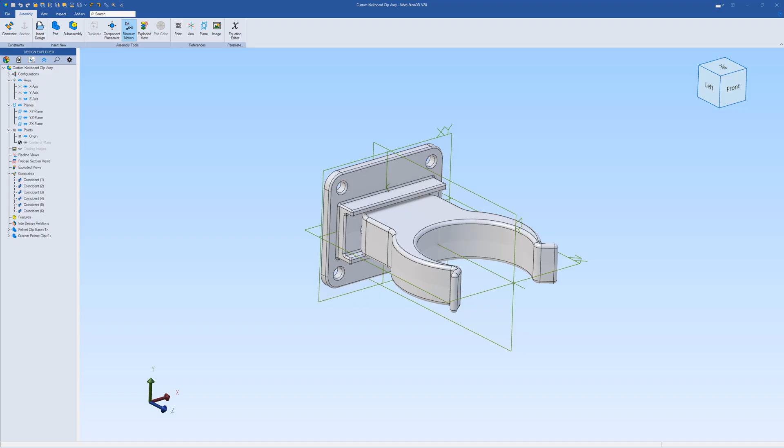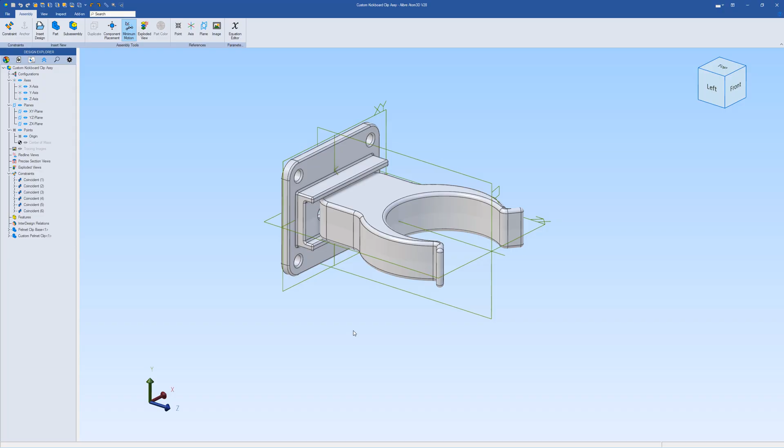Now the next tip we cover is some points on how to manage the 3D view. The standard view controls in Alibre, and most CAD packages, are fairly similar—you'll have the ability to rotate the view, zoom in and out using mouse controls. However, when you're modeling, or particularly when working in the assembly workspace, you end up having to zoom in to select fine details, and it can sometimes become quite confusing as to what part of the model you're looking at.

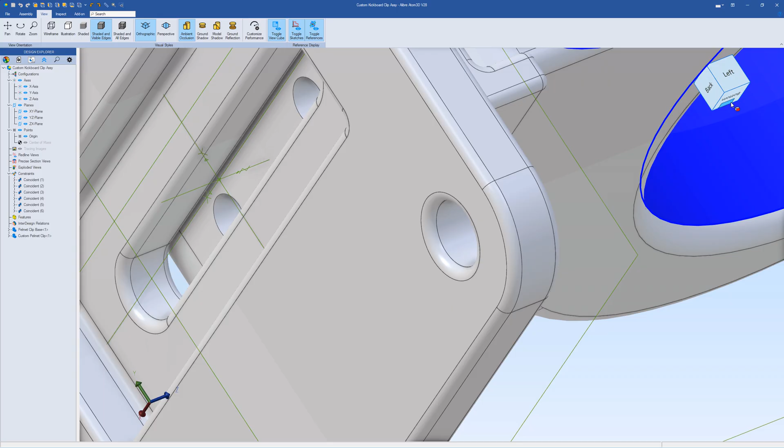So in Alibre, what I recommend doing is making sure that the view cube is turned on. We can just jump onto the view tab and make sure the toggle view cube button is turned on, and that creates this little cube top right here that shows the orientation. We can also click on any individual face or corner, and the software will automatically orient to the selected view and zoom out to fit the whole model.

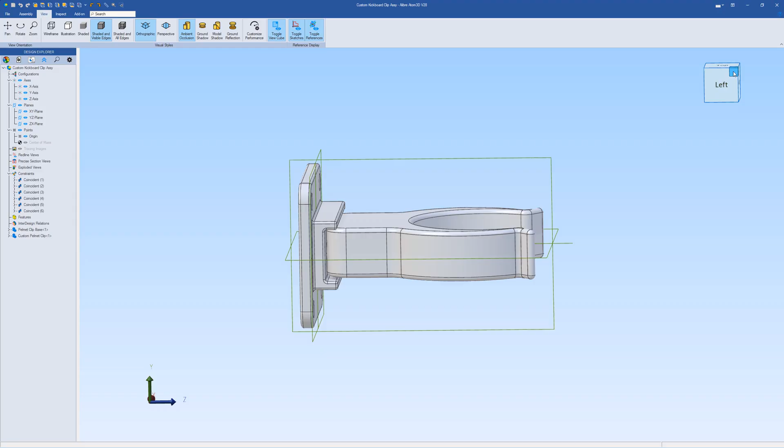For example, if I click on the left view, I'll zoom out and center looking at it from the left, or if I want a 3/4 view, I could pick one of the corners. That means no matter what funny zoomed in weird view I've got, I can quickly jump into something where I can see the overall model and get my bearings back. Particularly when you're starting out, that's a real get out of jail free card on your view.

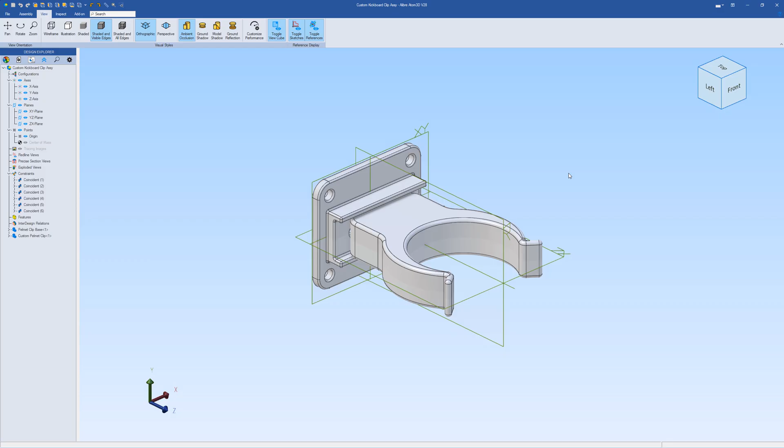So the other thing I wanted to go through, I'm just going to close this model down and the part we had open, and jump back to the Alibre home window. Something else I'd like to point out is that Alibre has some first-rate scaling and visual setting options. There are people I've spoken to who have less than perfect eyesight, or some guys working with the software who suffer from red-green color blindness, and some of the default colors or sizes of things in the out-of-the-box settings might be a little bit suboptimal view-wise. So we can go into system options, and I'll just go to this section.

The first one worth looking at is the design tree settings here under all workspaces, and we can adjust the size of the tree. By default I've got it on small, so if I change this up to medium, for example, go OK, and then jump back into the part we had open before, you can now see the tree on the left has been scaled up, which makes it a lot more readable. The other thing to note is that we can't scale the menu at the top, but the ribbon menu follows the Windows display scaling setting, so that should be scaled to a suitable level based on what you've got your monitor settings set to already.

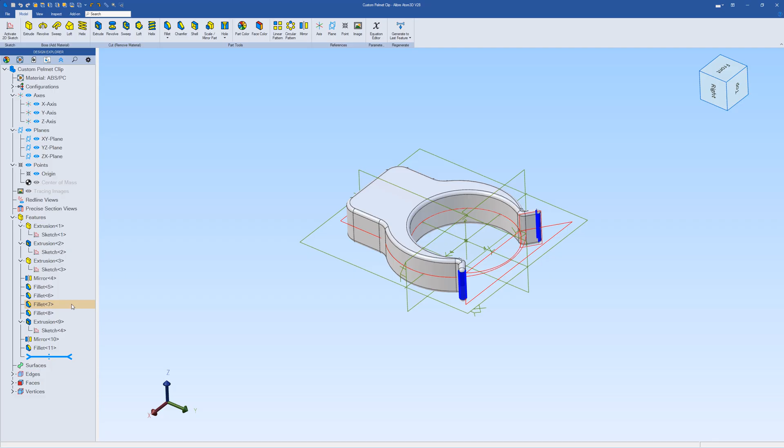But because this Design Explorer on the left is specific to this bit of software, Alibre have included dedicated settings to change the scaling of that. The other thing that's useful - I'm going to go back to the Utilities tab and System Options, and then we can go down, and the very last option here under Display is Color Scheme. Under here we can change the colors for all of the UI and display settings. The default scheme is generally good, but again, if you have red-green color blindness, it does feature red and green in quite a few places.

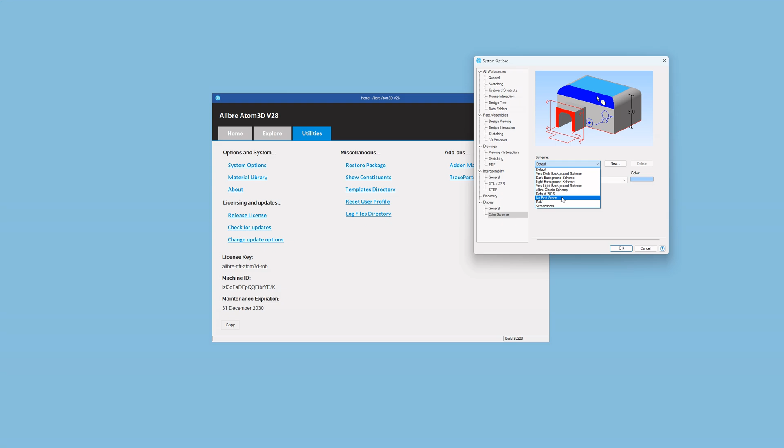So I worked with a client recently, and we created a custom color scheme, and there are notes on the Model Engineers Workshop forum about the exact settings we used for that, and I can post a screenshot of the settings we used, which you can run through the various sections and change the colors as needed. I've also been made aware that Alibre have been looking into this based on the feedback we gave them, and I think coming in the version 29 update cycle - I don't know if it'll be the initial release or a point update - version 29 should be including a scheme aimed specifically at red-green color blindness. Hopefully I will post an update about that when we know more.

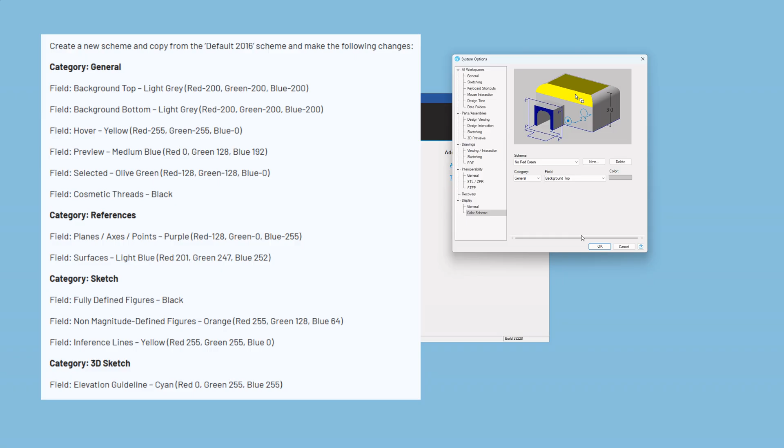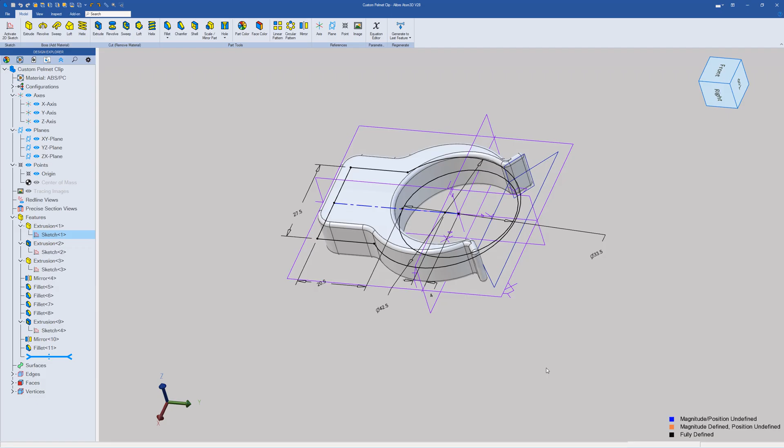But if I go on to the no-red-green theme we've set up there, and then jump back into the same part, now you can see that we're using different background colors. The profile sketches are now in blue rather than red, and if I jump into sketch, we're using blue, orange and black for the degrees of freedom colors rather than red, yellow and black. Again, this is just to avoid using colors that would potentially cause someone difficulty with that specific condition.

So I'll close this part down.

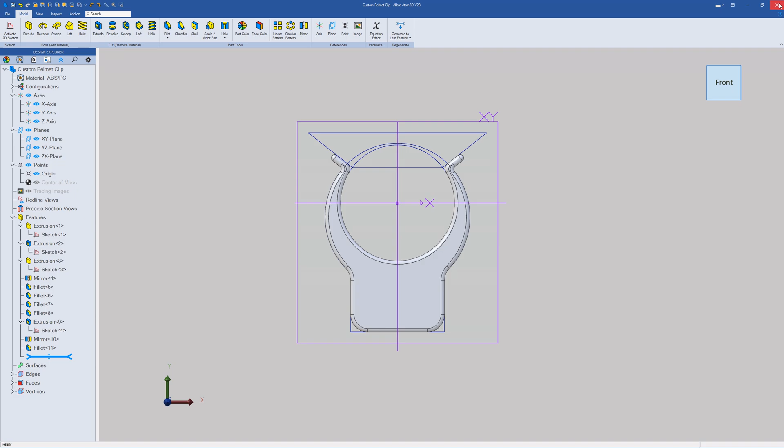The next set of tips are focused on just some general advice on part modeling.

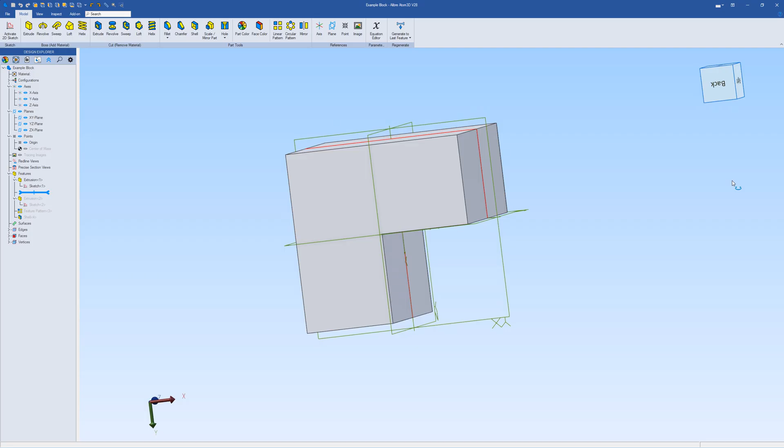So here I've got a very simple example part, a little L-shaped block. My first bit of advice is it's a good idea to work around center.

When you start a new part, Alibre gives us an origin point. So if I jump into the sketch we've created here, I've used that as my starting point and worked around that as a center, so I've got this part dead center.

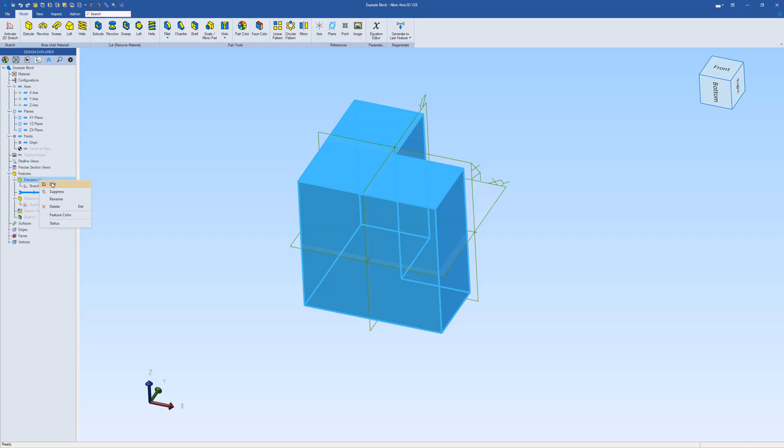The other thing I've done is that when I've used this to create an extrusion, instead of extruding from one side of the plane, I've used the mid plane command, which creates the distance I specify equally around the plane. The advantage is that I've got planes running through the center of the part on all three axes.

The reason this is desirable is that if I create a feature on this face here that has a corresponding feature on the other side, I can just create the feature and then mirror around the XY plane to duplicate it on the other side of the part.

Had I not built the part in the center, I would still be able to do it, but I would have to manually create a reference plane. So by working around a center, you give yourself this shortcut to using tools like mirror.

It can also be particularly handy when working in assemblies, because it's quite common when designing parts that you need to center them in relation to each other. By having planes running through the middle, you can use the part modeling reference planes as an alignment feature within the assembly workspace.

So I think working from around centers is generally good advice for part modeling. The only situation I can think of where that might not be what you want is...

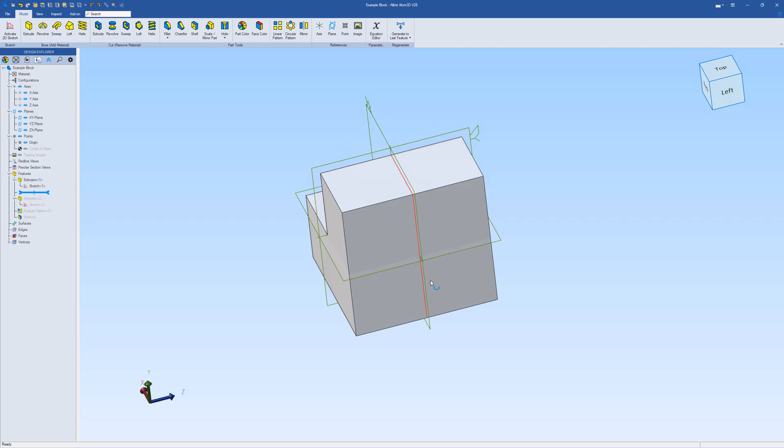Generally, CNC machines are set up with 0,0,0 being the start coordinate, and they expect cutting coordinates to be positive x, positive y, positive z, which would be this sort of quadrant in the top right corner here from this view.

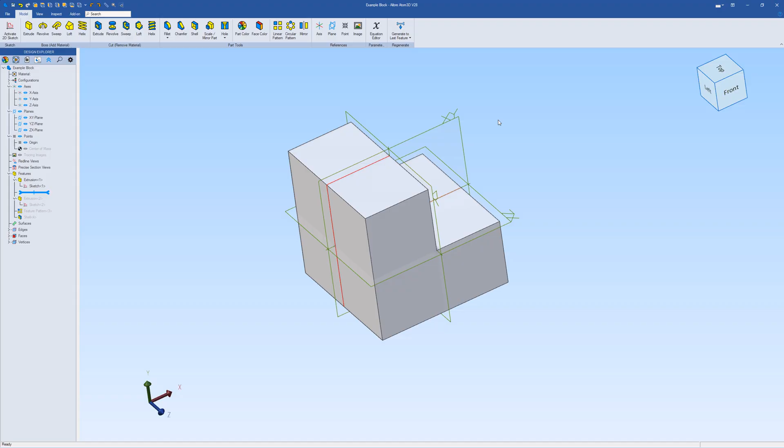So if you're driving a CNC toolpath from your parts, you can make your life a little easier by modeling in the plus x, plus y, plus z quadrant to avoid negative values, although I believe the MecSoft plugin does allow you to reposition the origin point to avoid that being a problem, but just something to be aware of.

But generally, as a sort of modeling advice, working around centers is a good idea.

The next tip I wanted to run through was, as I've said in the article, be lazy. One mistake I see people who are newer to CAD tools making is that where you've got a repeated feature, they'll go through and create planes and sketches for every single feature and end up duplicating a lot of work.

Apart from the fact that that takes longer, it also makes it quite difficult to update and iterate in your design. If you create a set of 4 ribs and you've got a separate sketch for each of the 4, you're going to need to go through and update all the sketches to make a change.

So if you know you're designing something that should be a feature that's common but repeated, what I'd recommend is creating one and then using tools like mirror or pattern to copy it to where it needs to go.

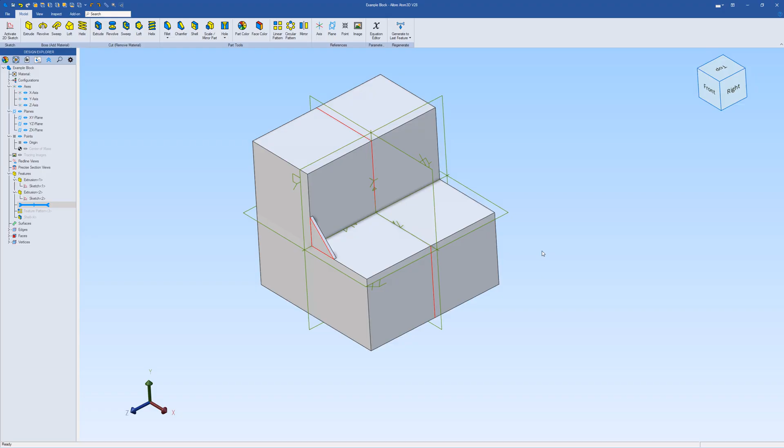For example, on this block here, I've got an example rib feature we've created, a simple 2mm thick 20 by 20 rib, and I'd like a series of 4 of them along this edge. So instead of modeling the rib 4 times, I can just use a linear pattern feature: select the feature we've created, select an edge, and then work out a spacing.

In this case, you can also type little formulas in. So in the spacing box, we can select the edge here. Alibre tells us that's 98mm. I know I want 4 instances, but there are 3 gaps, so if I do 98/3, that gives me the correct spacing to position all 4 along the length there. And then click OK.

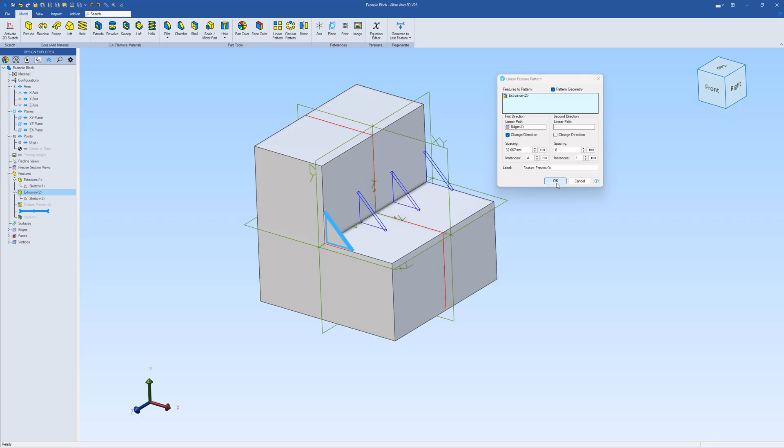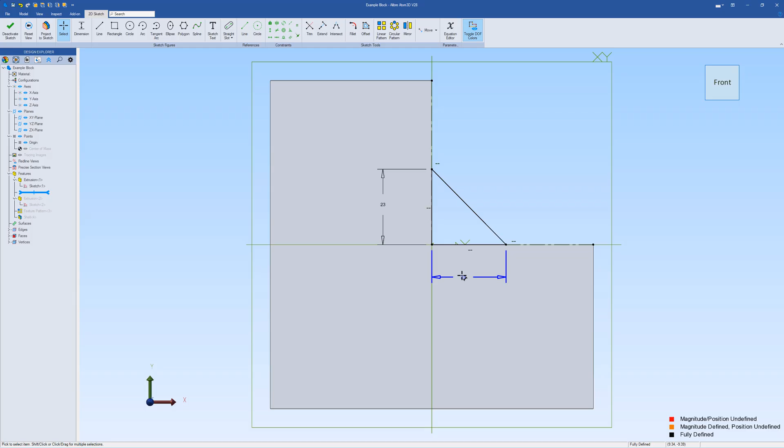And that copies those features in, and that has the advantage of, one, there's a lot less modelling, so it's quicker. But also, if I now decide that this rib needs to be slightly bigger, if I go back and edit the rib sketch, and let's say we're going to make it 23 mil, that updates. But thanks to using a pattern, all I do is just drag the dog bone, as they call it, down in the tree to re-enable the pattern feature, and all the subsequent instances of it update. So strongly recommend using patterns, circular patterns or mirror, wherever possible if you've got repeating features.

The final general tip on part modeling is to do with working with thin wall parts. So this at the moment is a solid block. That is the way I would recommend working with something, is to work with it as a solid for as long as possible, and then once you've got the exterior shape and design sorted out, then we can use the shell command to turn that into a thin wall feature.

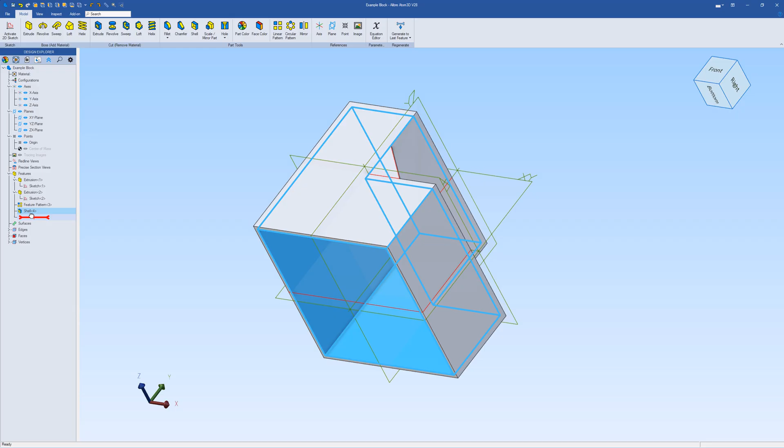So in this case I've got a shell there, but if I just delete this and run through this again, if we go on to shell, I need to specify faces to remove, and I need to give it a thickness. Let's say we're going to make this 2 mil thick. Now on faces to remove, I could leave that blank. So if I do that, that now makes the part hollow, but without having any open faces.

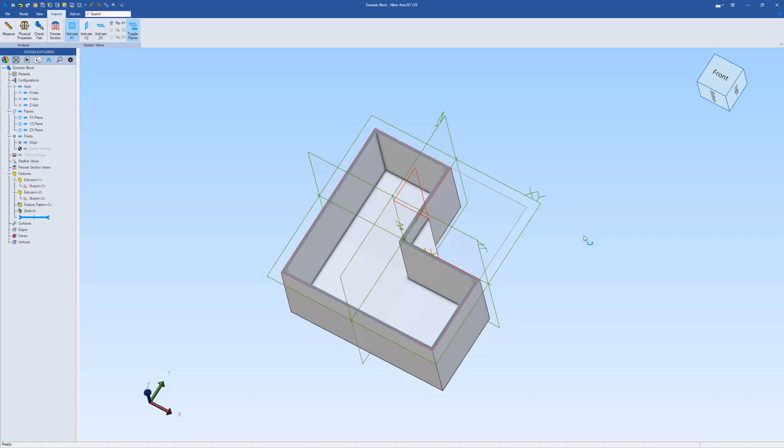Now if I just jump into inspect, we can go into, say, an XY section view, and you can see that we're open inside. That can be useful if, for example, you were planning on 3D printing this.

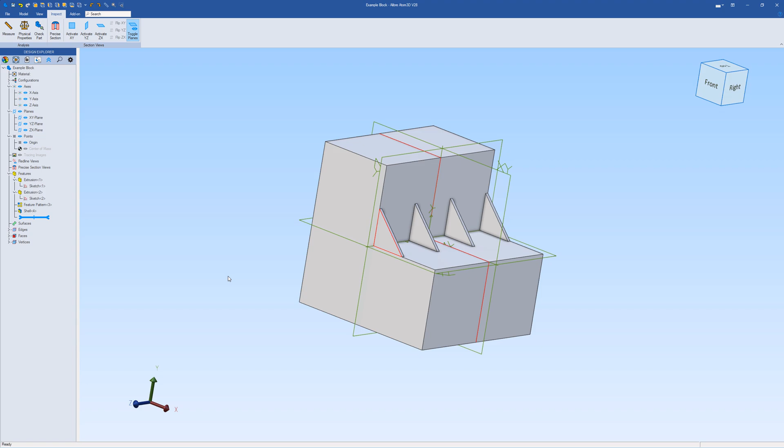If you leave it solid, then the 3D printer is going to fill the full volume. Probably most slicers will put in a sort of reduced density fill. However, if you make it thin walled, then the slicer should use just minimal support material, so you can actually save quite a lot of material if you don't need the part to be solid all the way through.

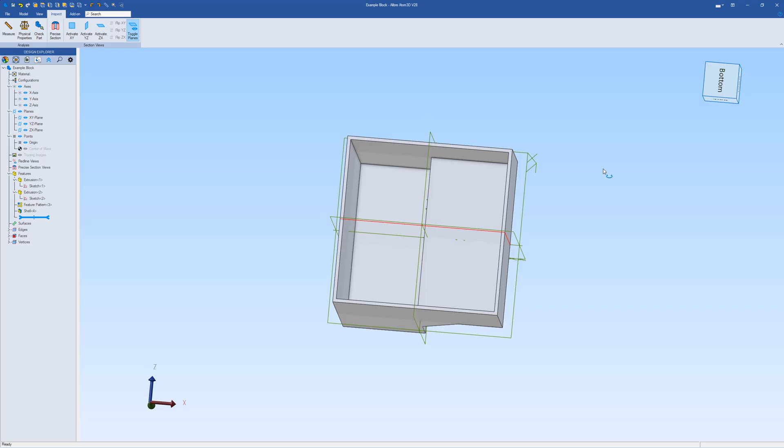The other thing though, in this case, this part I want it to be an open shell, sort of like a casing. So if I just go back into my shell command and I'm going to set this bottom face to be open and go OK, that will give us sort of like a plastic casing or cover, for example. It gives us an open cavity.

And so if this then needed some interior details, the way I would work is model everything on the exterior, then apply a shell, and then we can start adding fine details on the inside. But whilst you're working with the solid, you can overlap sketches into the solid volume, and it's just going to merge together.

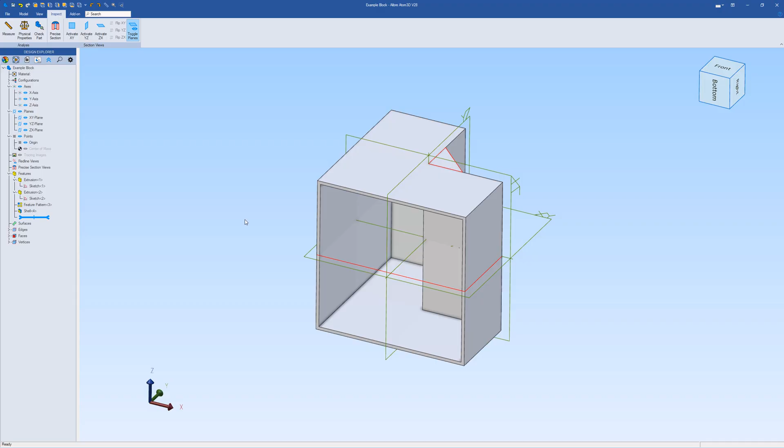Whereas now it's thin walled, if I was to try and put a feature on an edge or a face on the side, I do have to be mindful about how deep into the part it goes before it starts coming through onto the inside, and then I'd have to do extra work to tidy that up. So working as a solid for as long as possible generally makes your life easier.

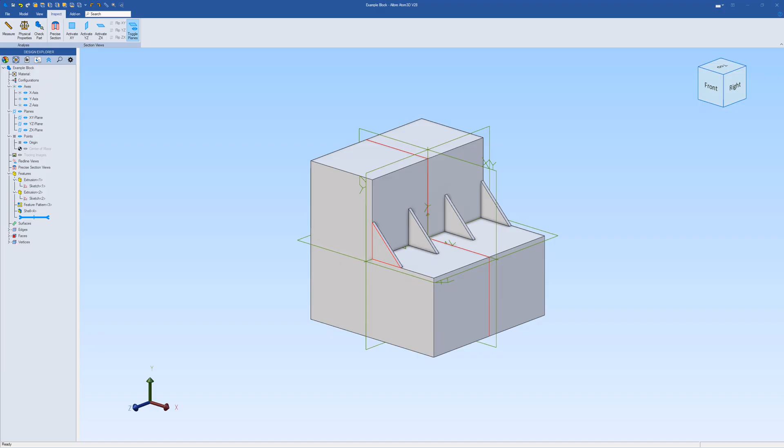So that's everything I wanted to go through in this video. I hope you found that useful, and we'll be back with the second part, looking at a series of tips based on sketching, some things that might make life easier with assemblies, and then also looking at some things you may not be aware of on the drawing tools.